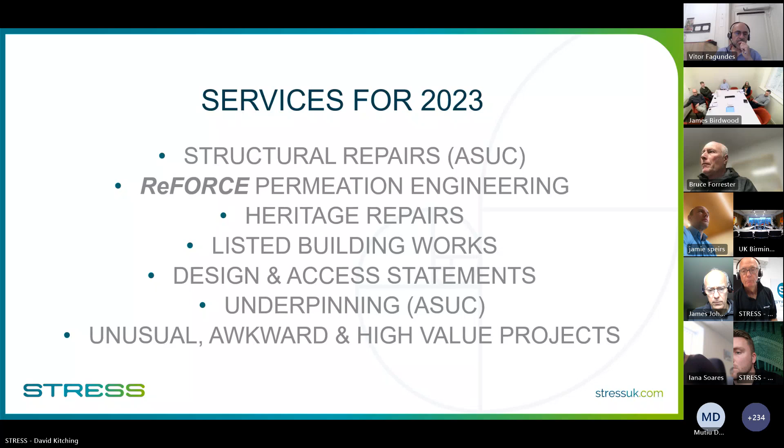For some reason that button's not working. So within the structural repair side, which we're going to concentrate on today, there is that standard masonry reinforcement. We're Helifix approved contractors. Crack bonding repairs, cosmetic refurbishment - we're going to look at that quite carefully today. Stone repairs, if you're dealing with old listed buildings, you're bound to have to deal with stone, and so you need techniques to go with that. And we give guarantees as well with any of the work we do.

So let's get stuck into it with something that I think you probably all recognise there, be it loss adjusters or engineers, surveyors, anybody that gets involved in buildings of any age really, because you can get ground disturbance at any time, causes problems. And there are obviously other reasons that go with it. That's the point - try and find out what you think has caused it and identify the cause before you really plan to try and put it right.

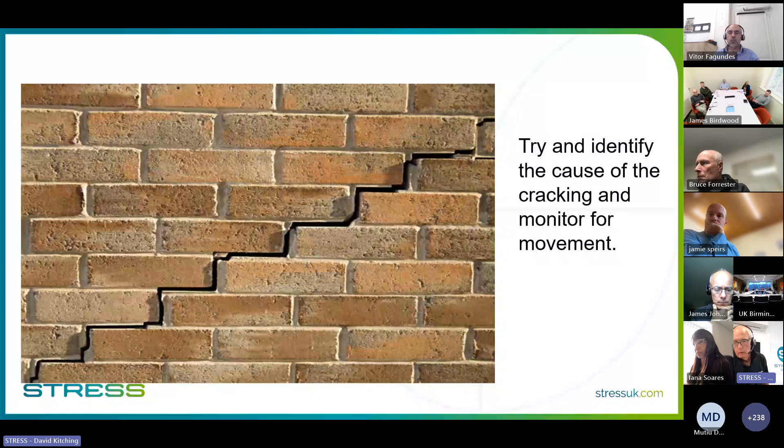Find out what caused the repair and what aesthetic issues there would be in repairing that structure. We'll see some of these issues as we go through today. You need to disguise the repairs, because if you're a property owner, or involved in your office block, and you needed structural repairs, would you actually want to see them, or would you prefer if they were blended in nicely so they can't be seen? So it's really important to think about the aesthetics when specifying a structural repair.

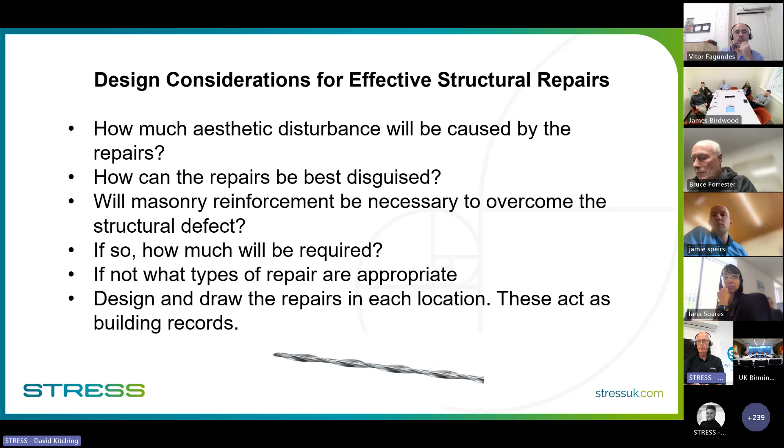Can you use masonry reinforcement? It's very useful, and if you are going to use it, how much do you need? Don't put too much in. And of course, put all this down on a drawing, because if you're going to use it within a listed building, you're going to need to record all the aspects of the repair.

For those who haven't seen masonry reinforcement being installed, here are three simple pictures showing the various stages. Top left, the guy with the blue hat is using what's called a Hilti wall chaser, which you'll see later in the presentation. Very useful tool - we've been using these for over 20 years, and they do a very neat, accurate cut into anything, concrete, stone, or brickwork.

The idea is to neatly take out the bed joint so you can install the masonry reinforcement. That picture shows him operating a vacuum recovery machine, which produces very little dust, useful when working around domestic properties. The guy at the bottom is feeding in, not helibar, but Betinox, a ribbed stainless steel bar also made by Helifix, which we tend to use more in bridges and larger structures, and he's feeding that into the slot.

The chap above is John Heseltine, general manager of Helifix, pretending to gun the helibond or grout into the slot which surrounds the bar and bonds it with the brickwork. You can then repoint over the top with heritage mortars or sand and cement, anything that matches the surrounding brickwork. So that's really how it's put in.

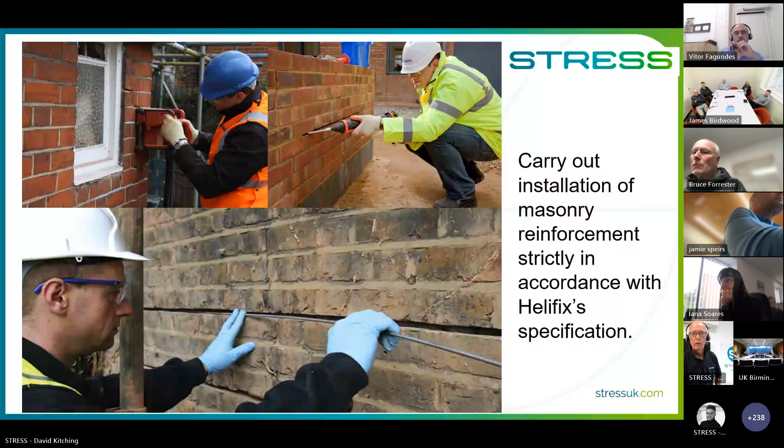The design is completely different, obviously, but that is how it's installed. So, know your building.

But don't be afraid to use modern materials. We use Helifix all the time in listed buildings. As long as it's carefully used and disguised properly, it's a perfectly good method of repairing and strengthening bits and pieces.

Involve the conservation officer early in your projects. Get him involved, tell him what your options are. He will comment, he may say no, I don't agree, or you can do that, I like that, tell me more about it. Let him know the pros and cons, and he or she will come on board and work with you on it. Very important.

Let's look at something very simple: a domestic property repair. This is very typical for loss adjusters, surveyors, and engineers dealing with insurance work - we see this all the time. Slight settlement of the left flank wall - we found out when we went in and did the investigation that those drain pipes, probably there since 1938 when it was built, were never linked to any drainage. They just literally poured into the ground, and of course they caused washout, slight settlement of that wall, and cracking.

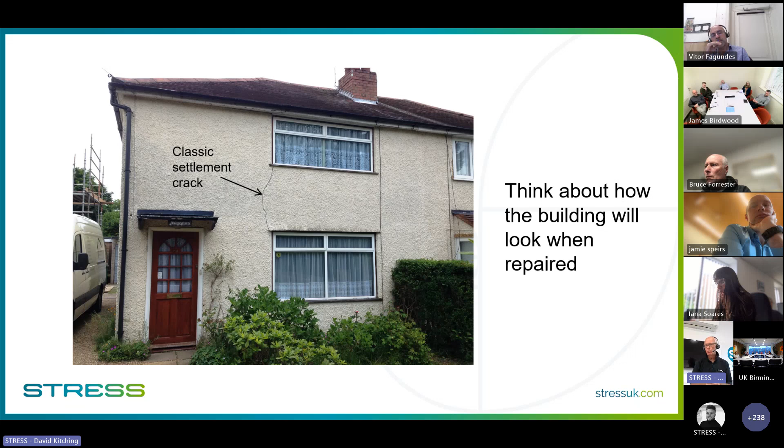It's been there, I don't know, 20, 25 years. It's had numerous coats of paint. You put a new line in, even if you're brilliant at it, it will always catch the sun somewhere and you will see those scarred lines. So what do we do in situations like this?

Go inside. Now of course that means you're going to disturb the inside of the property as well. When you explain to the client that's what you're going to do, they're usually pretty receptive about it. So we went inside the bedroom, took the plaster off, most of it falls off, exposed the crack, and installed what's called a heli beam — that's two twin bars to bridge that crack. Resin bond it, replaster, repaint on the inside, and you will never see it. So that's the beauty of that.

Now that is a solid wall, which means you don't have two different skins. But even if you do, those of you who know the Helifix standard details will see that you don't need to put a beam on both leaves, inside and out. You can do them on one, and then put ties through to the other. So if you're working on the outside, you can tie the inside to it. Perfectly legitimate.

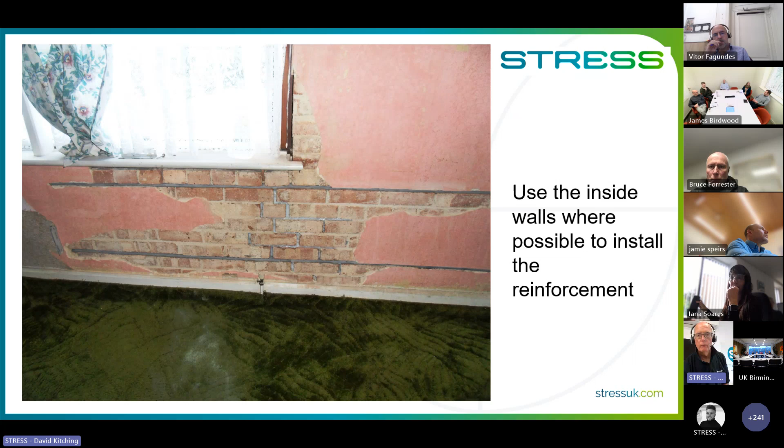Result. Now, when you go outside, all you need is some very careful cosmetic work to the render, making sure it's not blown. If you've got a big blown patch, you've not got much choice other than to take it off. But in this case, you do some very careful little render along the crack, sponges, different grouts, that sort of thing, and then paint it.

It's not invisible, but actually I go past this on my bike, cycling maybe 2 or 3 times a week, and in different lights it's very difficult to see, which I'm pleased about. So that's the art of structural repair — perfectly adequate structurally, but made aesthetically acceptable.

Right, let's go on to something a little more challenging. A listed building in a place called Haddenham, which is out in Oxfordshire.

We were called in by a main contractor who we do a lot of structural repair work for, and his special projects division had this old pub, the Green Dragon, to refurbish for a client who'd bought it, and I think actually wanted to flip it as a dwelling.

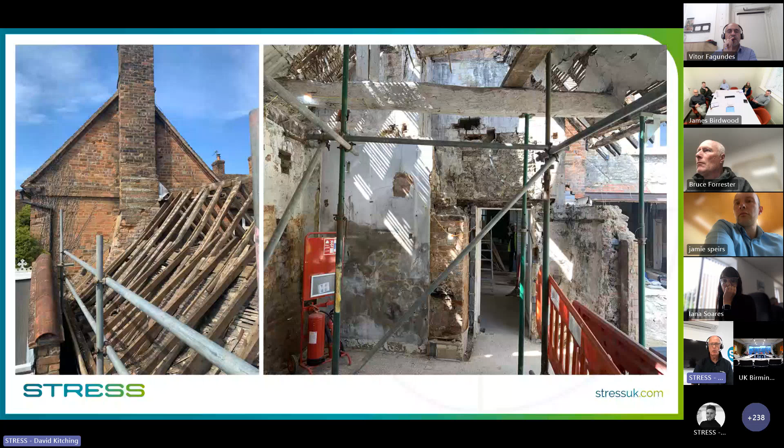We came across major problems, as you can see the state of it. But the particular problem we were asked to look at was that gable wall you can see on the left. It was waving about in the breeze, cracked all over the place, loose brickwork, and generally not looking very tidy. As you can see there, looking up it, the state of it.

We were called in to say, could we repair it? And we said, we think we can. What are the alternatives? The alternatives obviously were to take that wall down and rebuild it. The conservation officer wasn't going to have that, and the client didn't like the size of the bill he was going to get for that either.

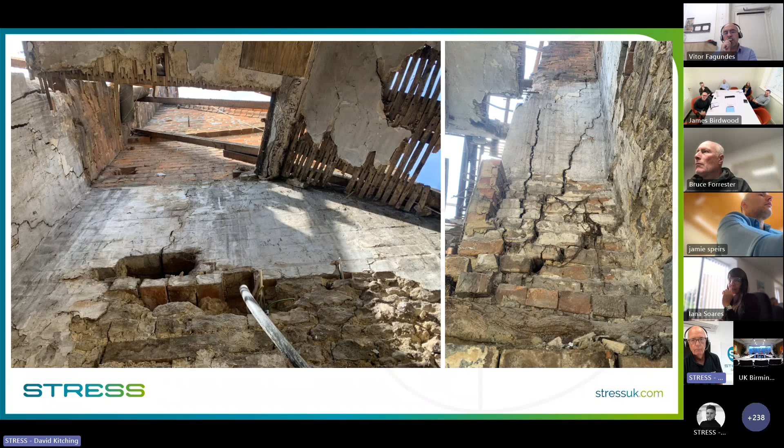So we were asked to put a scheme together for it, to see whether we could actually save that wall, structurally enhance it, and make sure it was good for the future. So what do you have to do?

Well, as with anything, there's nothing particularly wonderful about this. You make sure you've got drawings and drawing records for it, particularly if it's a listed building. These have to be part of the archive so that everybody can see what has been done in the past. But this was the gable. Normally we'll do it on CAD. This particular one, because it's interesting, was actually done quite quickly on architect's drawings so that they could be agreed with the client and the conservation officer.

So you can actually draw on everything you're going to do. They also act as drawings for your crew when they go on site, to know exactly what it is that they're going to do.

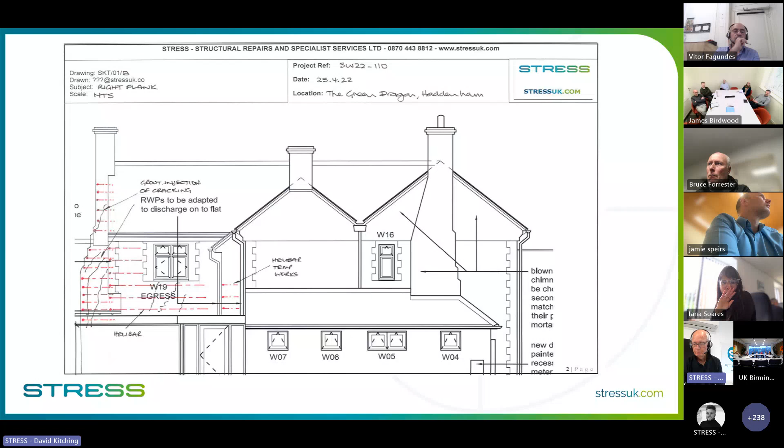Plan of that gable wall. Now the interesting thing here is where I've got that little handwritten note on the top right hand corner.

It's a standard detail that isn't used by everybody. What we see a lot of the time is specifications for an angle tie that goes around the inside of the wall, so on both internal faces.

Now the problem with that is the gable wall, as we know, was rebuilt at some point in time in brickwork, and was never tied into the flank wall of stonework, and hence it waved in the breeze. It was live.

So if you're going to tie that in, the best way to do it is to actually chase along the flank wall, drill through to the outside of the gable wall and return the bar on the outside. You then have the full tensile strength of the bar taken into account when you're tying it in. Just very simple details like that.

Obviously, if you're going round on the outside of the wall, we couldn't in this particular case because it was straight onto a party wall into someone's garden and they didn't want to play ball.

If, as you can see on the other corner, you go around the outside, that's always going to take the tensile stresses and strains.

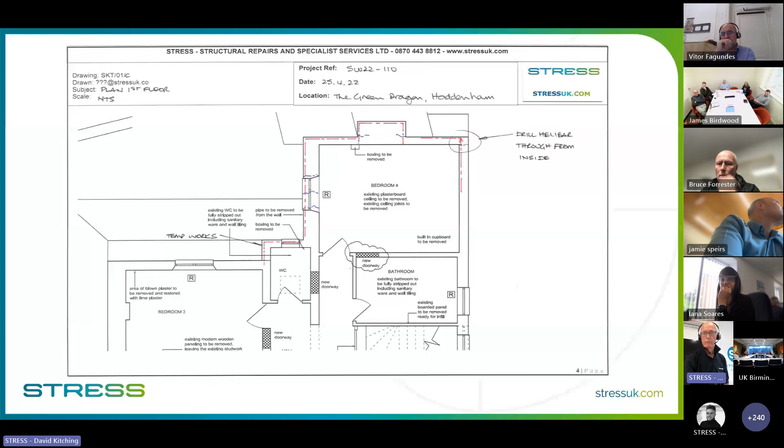Still not working now. So there we are. Right, we're starting to put the Helibar in.

Now, as you can see here, and this is another aesthetic point of view, that's stonework, fairly regular block size stonework, but irregular enough to cause a bed joint that's not perfectly straight. So if we then cut using the Hilti wall chaser into that stonework, we would end up with bed joints that were straight in a wall where all the other bed joints are actually irregular, and it would stand up like a sore thumb.

So in fact, you hand chase these out. We've got various tools we can use, but generally we'll use a hammer and chisel, and we'll actually chase out the bed joint to the right depth. You'll see why you do that in a minute.

You can then still put the masonry reinforcement in. It'll follow all those little nice lines, and you can surround it in grout.

If you've got brickwork, of course, you can use that Hilti wall chaser. And the important thing here, and why I show this photograph, is if you're going to site, you've got one of these jobs going on, and you want to see what the contractor's doing. These are the tips to look for.

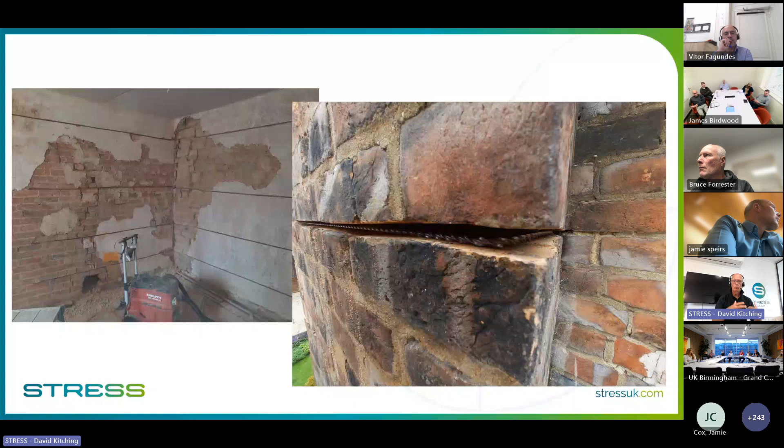This gives you an idea of when it's completed, you see in that stonework it's very difficult to actually see where we'd put the Helibar. In the straight brickwork you can see slightly different coloured mortar, like on the gable wall there, some straight lines, but that will weather down. We've used a lime mortar to match the consistency of what's there, and that will weather down over time so you won't see it. But in the stonework, where it's slightly irregular, you need to be really careful. As you can see there, when it's completed, it's looking pretty good.

So there we go. In fact, there's a heli beam running under that right-hand window you can see above the glazed extension at ground floor level, because they needed to extend the opening. There was an old steel in there, and we helped them by putting a heli beam under that right-hand window on the rear, which meant they could just do lightweight propping and get the steel in really easily. They put more load on that right-hand corner, but we just underpinned it and helped them take that load. A very successful little project.

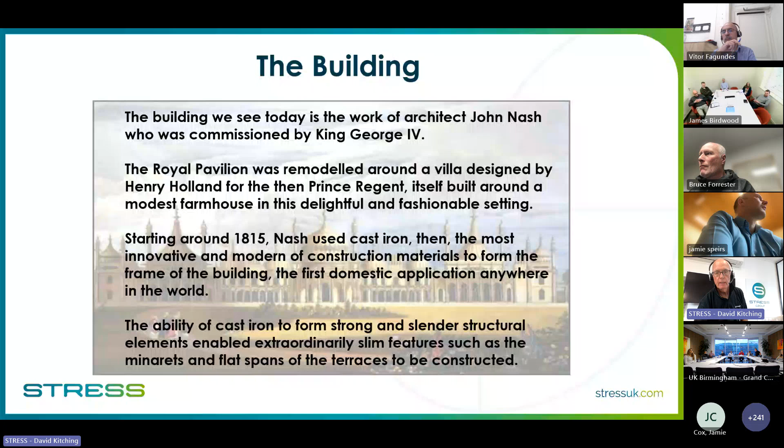And so he worked into it using this. These are the things you will know John Nash for, if you've been to or live in London - very famous for a lot of rather monumental structures.

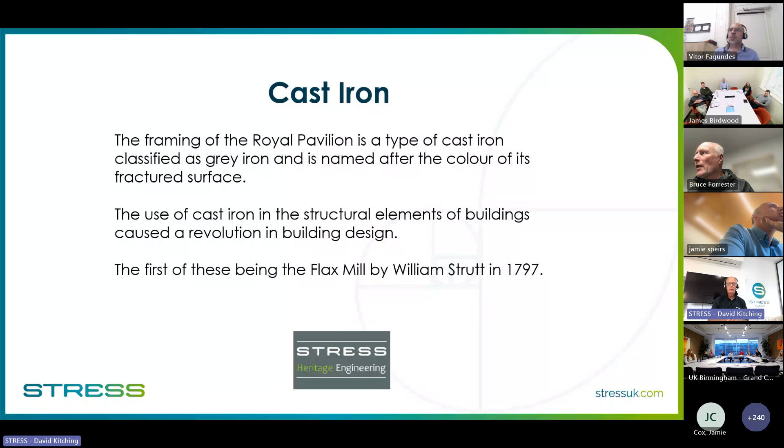So back at the end of the 18th century, he looked at the first type of building using cast iron, which was the flax mill up in the North Midlands. You can go and see this - it's a museum now, but it was an industrial building, a flax mill. You'll see in a minute how it makes a difference to the opening space you get. Can you imagine the old days there'd be brick walls or big timber columns, timber beams, timber floors - everything bounced around. By using cast iron, you can increase the slenderness of the columns. You use jack arches - cast iron beams with curved brickwork, transferring the load of the floor into the beams. So that's why he wanted to use it at the Royal Pavilion.

There is, however, a problem with cast iron. For those of you who have probably smashed a cast iron grate, you know that if you hit it hard, it will shatter. Which shouldn't really be a problem because most beams aren't going to get hit by a hammer - might get hit by a vehicle if at ground floor level, but unlikely to get hit by anything. But they do get brittle failure. And what happened back in the early 2000s was that a roof collapsed in Bayswater, a roof supported by cast iron beams, which put a scare amongst all asset owners who had cast iron elements in their structures.

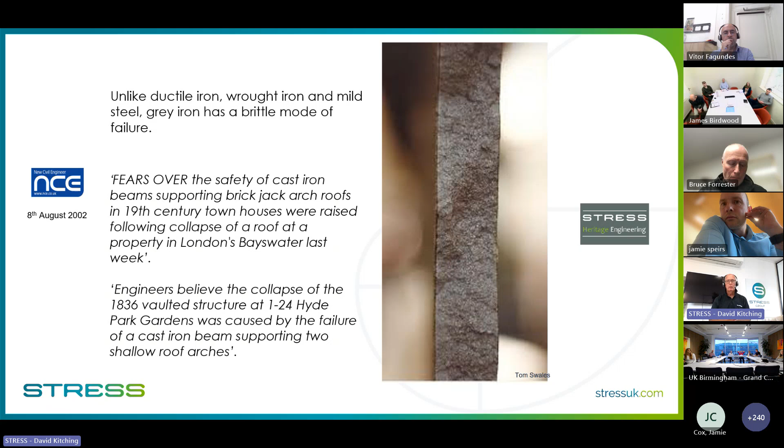We'll find out why you get that unreliable parameter with it. You don't know whether it's actually going to go or not, or exactly just how strong that cast iron beam is. And the reason is the way it's cast.

You've probably seen this on TV - they'll make a mold in a sand pit and then pour the molten cast iron into it. Now, while it's still molten, gases are rising up to the flange, which is the top at the moment, and they bring all the little impurities with them. So where you want most tensile strength, you've got a relatively unreliable and contaminated area of the cast iron.

So when you turn that over, you're not quite sure just how pure that cast iron is. And so what happens is it maybe gets overstressed, there may be an age issue, but it will suddenly fail, and it fails in a catastrophic way.

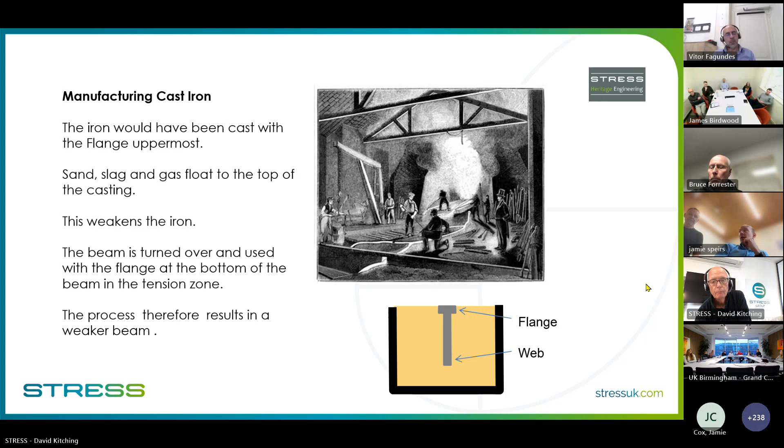So concerns were raised at the Brighton Royal Pavilion by the owners, and they brought in the same engineers who'd looked at the Bayswater collapse, John Holden Associates, who went and analysed the beams under the Adelaide Terrace and realised that it was cast iron of fairly poor quality, and therefore there was a risk.

That balcony is used for the public. You can go out there, you may have been out there. There's a restaurant, and on sunny days there's tables out there. You can go out and sit on that. It's used for weddings, for government and commercial parties and things like that. So you can have anything up to a couple of hundred people jumping about on that balcony.

There was a problem - nobody quite knew exactly what the capacity of that balcony was. And so they had to prop it. That was the shortest, simplest thing they could do while they looked for a solution.

So you can see here the centre line of props that were put up to halve the effective length of those beams, which are running between the wall on the right and the column and beams on the left.

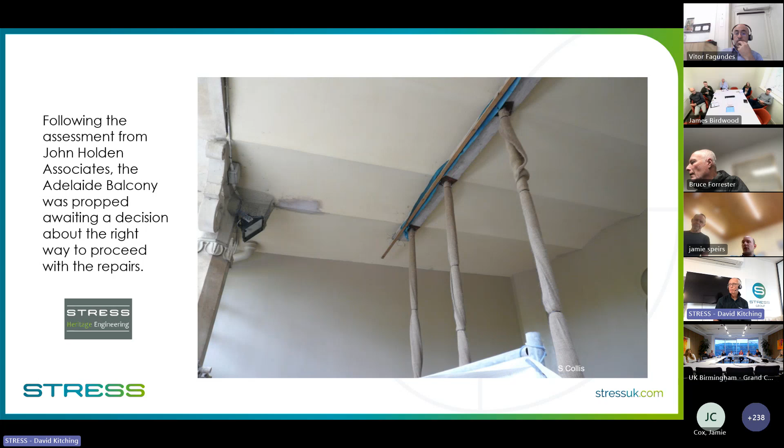And this is where we were called in because we'd done quite a bit of work for Brighton Council on some of their listed buildings down there, and they said, do you have a solution for this?

So we looked at it, we looked at all the information that we could find, and we came up with a selection of remedial options, one of which was to do nothing, but then you risk collapse, or you just don't use the balcony at all. That's really unacceptable - it brings a lot of money in, and therefore they couldn't have that.

So we thought, how about some carbon fiber? For those of you who have actually seen carbon fiber plate, it's incredibly stiff. And as you know, it's used for all sorts of purposes - very strong, very light. Wouldn't that be a perfect thing to use at the Brighton Pavilion? Remember, I'm thinking about innovative ways of strengthening.

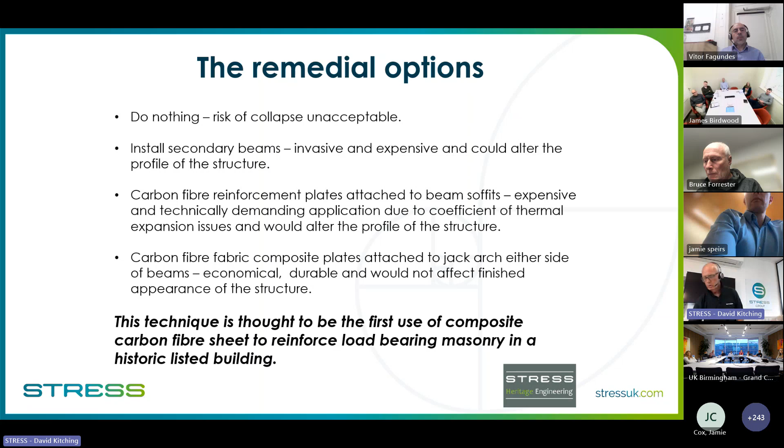Carbon fiber, we know, is used for all sorts of things, usually a bidirectional filament in the fabric. We don't want that because we only want to use this sheet in tension. So we're happy to have all the fabric run in one direction, like the plate, filaments less than 0.3 of a millimeter, all run in one direction so you get maximum tensile capacity, but they're not bound together with epoxy binder, so they're loose. This one's woven, bidirectional, but the ones we use are monodirectional. As you can see, it's got a loose weave in it to stop it falling apart, and then it can be used to adhere to any structure.

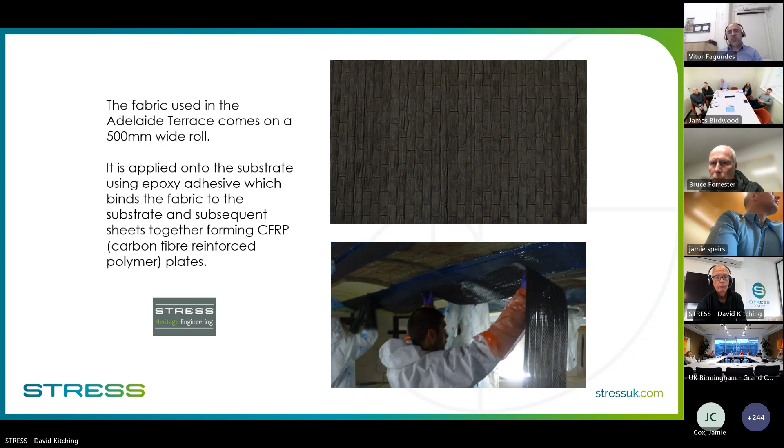Colin Toms and Partners originally came up with a design for strengthening jack arches, and this is what was used by our conservation engineers, CTP. They do a lot of work for Brighton Council and came on board with this. They're actually heritage engineers who deal with carbon fiber, so they were ideal for doing the design. What we ended up with were two strips for each arch, 200 mil wide, full length of the brickwork arch, on each of the jack arches.

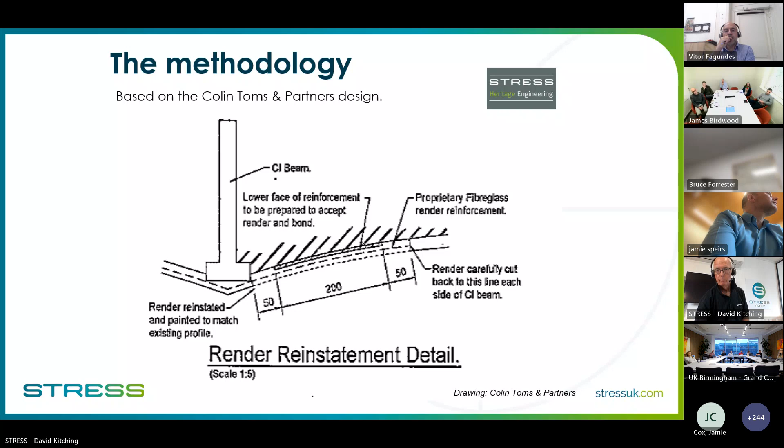Listed building, absolutely priceless. Behind those props on that wall and through the windows is the King's Apartments, full of priceless artifacts. So Brighton Royal Pavilion are paranoid about water, dust, fire, vibration, anything that could disturb the artifacts. And they wanted to keep the museum open as well, since it brings in revenue. So we had to be very careful.

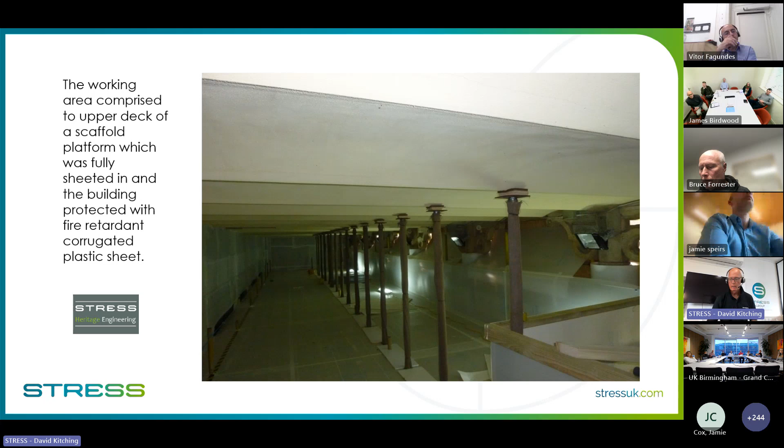Everything gets wrapped, fireproofed, and encapsulated. We had a full working environment, protected from the outside and protecting the rest of the building from anything we're doing. And here we are: we've got the scaffolding in place, all with fire resistant boarding, everything wrapped in fire resistant blankets, and ready for the off.

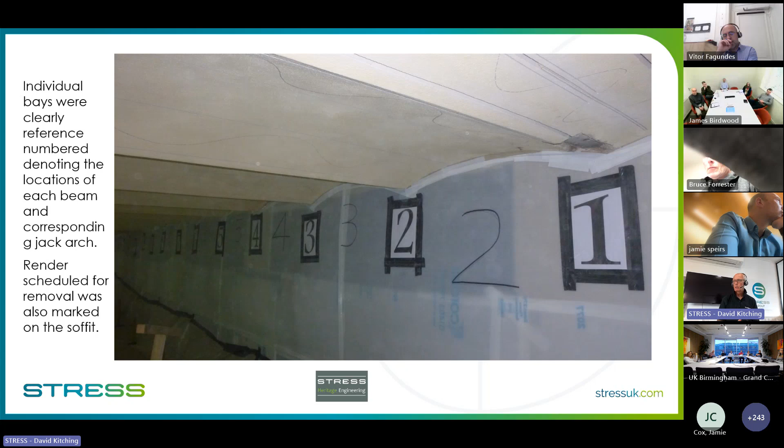Going back to listed buildings, you have to record everything you do to it, everything you find. So each of the cast iron beams was given a number, which you can see there in black with tape around it, and each of the brick arches was labelled as well. That means when you expose them, you can record exactly what you find against the number.

Now you can probably see that good old Hilti wall chaser again. We use those because we can control the width and depth of the cut very accurately, to less than a millimeter. What we wanted here was to take off as little of the render on the underside of the brick arches as possible, because one of the things with listed buildings is the conservation officer will only want you to remove the absolute essential amount of material. Leave whatever can stay, should stay. So we literally tried to take out slivers 200 mil wide—well, actually 300 mil wide, because you want 50 mil either side to get the material in—300 mil wide and the full length for each of those arches.

What we found was that a lot of that render had debonded and fell off. But you can see on the left there, that biscuit of render left in the middle—we had to keep it and match to it. So here we are, we've exposed the brick arches. Now you can see that in fact it's not only brick, there's a bit of stone there. These are the surprises you find when you uncover things—they'd used bits of Portland stone in the webs of the beams. We presume because a brick just wasn't quite the right size, so they used stonework cut to fit tightly in there and keep compression in the arches.

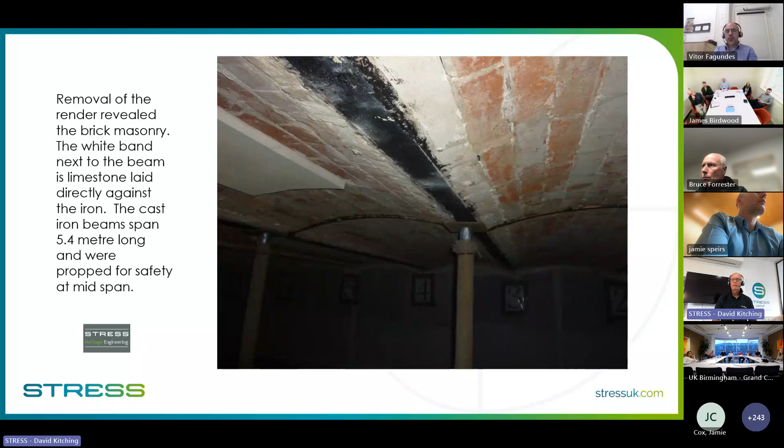You can see those beams are 5.4 meters, and there we are, fully stripped off. A lot of that render fell off, so it wasn't really doing anything other than just hanging off the surface, or the underside of the brick arches. We then obviously clean up.

And we've got ourselves a nice working environment. Now, for those of you who haven't dealt with carbon fiber before, I'm going to go back to that plate. To make this work on any surface, in other words, mostly this is used to adhere to the underside of reinforced concrete slabs and beams. But if it doesn't bond to the concrete, it's never going to be able to distribute the load into it.

So you have to do what's called pull-off tests. And here we are testing the brickwork, because again, if that brickwork couldn't transmit its load to the carbon fiber sheet, you might as well use duct tape. So we need to check the bond. These are little 50 mil diameter dollies, about 2,000 square millimeters on each area.

You glue it to the surface and then you try and pull it off. And as long as you reach a minimum of 1.25 newtons per millimeter squared in that pull off, you will fully mobilize the tensile capacity of whatever you're going to put on the surface. So we went round and we tested in various areas and got really good results. I've got to say, it was amazing.

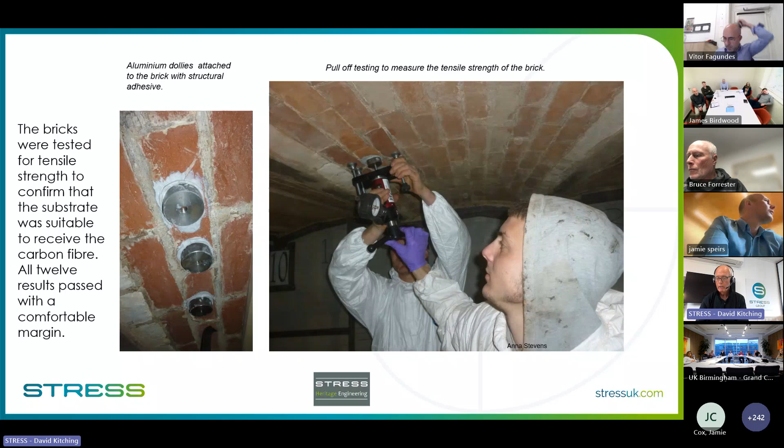So before we started putting the carbon fiber on, we jacked a little bit of load out of the balcony itself. Each of those props had a little flat jack put on the top. And you've got Annie here. She's our conservation manager, and she took charge of ensuring that we had 8 kilonewtons in each of the jacks throughout the project.

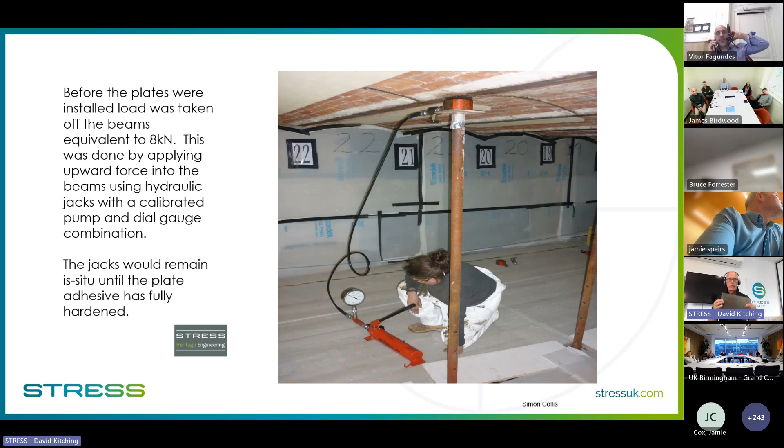That just takes a little bit of deflection. I know I said they don't bend, but you still get a little bit of deflection in the balcony, and it was enough that once we removed those and you get that little bit of settlement of the balcony, it will put the fabric under tension and the fabric will then immediately start helping the brickwork.

So we got ourselves this laboratory now, and we have to cut the carbon fiber sheet. This was a few years ago. You can now get sheet in various different roll widths. In this particular case, we had to buy it at 0.5 meter and cut it down to 200 millimeter strips. So it's a relatively easy thing to do with shears, you just run along there and do that into the rolls you've got.

You then need to make sure that your brickwork is perfect, because if there's any dust on there—for those of you who've cut your hand, got a dirty finger because you've been gardening or whatever, stick an elastoplast on it. Elastoplast doesn't stick to mud. Well, it doesn't—carbon fiber won't stick to dusty brickwork either. So the brickwork has got to be really clean.

So it's cleaned and it's then primed. You actually put a primer on it. But what you then find, if you put a straight edge to it, is there's lots of little variations between the bricks. They're not quite at the same angle. They're not quite the same height, which doesn't really matter structurally.

But when you're trying to stick something to it, can you imagine sticking wallpaper to badly plastered walls where bits of plaster are missing? You get debonding, you get holes where the paper isn't attached to the plaster. And as soon as you start doing that in brickwork, you're reducing the effectiveness of the carbon fiber. So you have to make sure you're sticking to a uniform surface. So unfortunately, even on decent brickwork like this, you've got to put up what's called a regulating coat.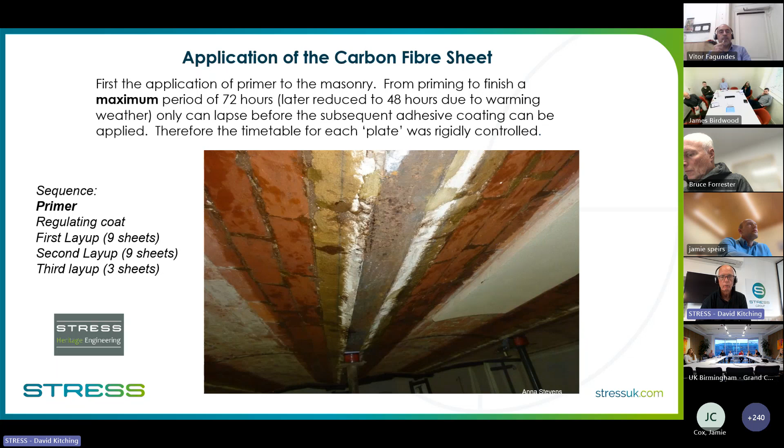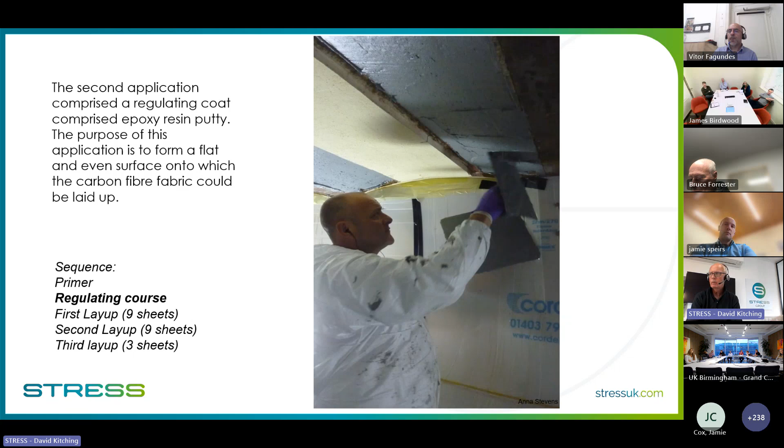As we can see here, we are about to lay on 21 sheets, layers of carbon fiber sheet. Don't know why it wasn't 7, 7, 7. We ended up doing 9, 9, and 3, but there we are.

And you put it on with, as you can imagine, a fairly low viscosity epoxy resin. We use blue only because we could see where it was, no particular reason. Normally it's sort of a honey color, and it's fairly low viscosity, so it will soak through the carbon fiber sheet, and you end up with a complete monocoque of carbon fiber and cured epoxy.

When you've put one sheet up, to make sure that it's bonded tightly to the one above, you use a sort of rubber squeegee and pull it through, which squeezes it tight up to the layer above, and makes sure that you get resin passing all the way through.

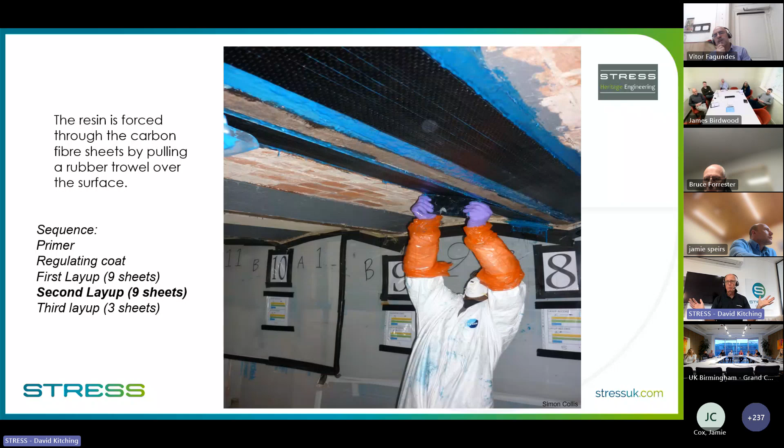You then go wet on wet, putting up those 9 layers, then leave it and move on to the next one. The more wet you've put up there, the more that's hanging while it's curing onto that first layer. If that first layer doesn't bond, you might as well not have bothered. So you do it in layers, let it cure, and you can get there.

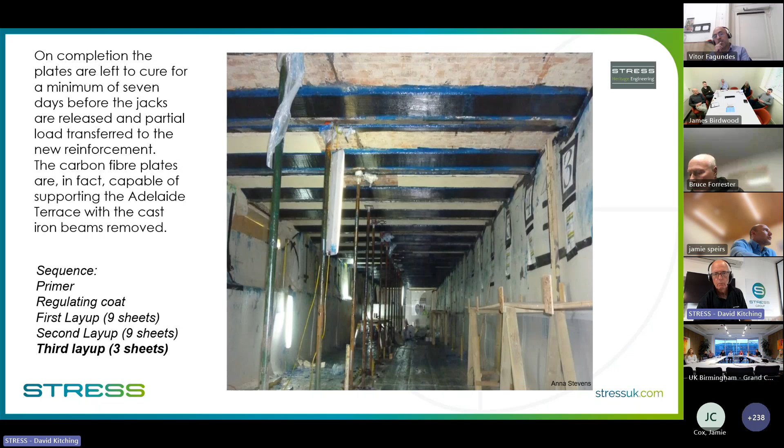So there we are, we've got all the beams now strengthened. The next thing is to do the aesthetics. This is almost the most important bit in terms of the listed building work - we've got to put back the render that's missing.

So you put a scratch coat up. We had the render analyzed, and what was amazing - because we imagined it would be a lime render - it wasn't, it was sand cement. So it must have been done within the last 30 or 40 years. They didn't have a record of it that we could find, but we matched it. They did allow us to put in what's called SBR, an additive that makes it slightly more sticky, so it bonds much better to the substrate and to itself. That's a scratch coat, and as you can see, our master plasterer John did quite a remarkable job matching up the render on the underside of it.

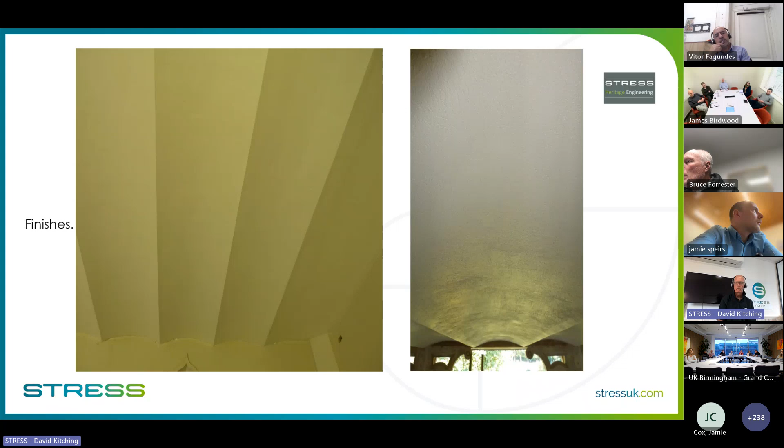And when it's completed, it looks like that. So the Adelaide balcony is now strengthened with carbon fibre. It has a factor of safety in excess of 2, and they can use that balcony quite happily, jumping up and down on it and partying.

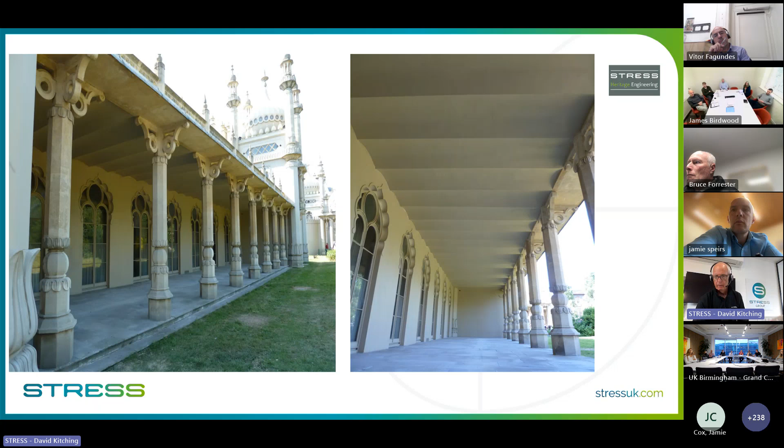So a very happy client and a very happy conservation officer. These sorts of heritage works will take us all over the country, and we can help anybody dealing with it - with design and access statements and making sure you can get listed building consent for those who have problems with that. But we love unusual projects, as you'll see.

We're gonna go on to structural repairs now. Sorry, I don't know why the button's not working.

And it's been great up until a few years ago when they started getting cracks - we think through foundation movement, we can't find any other explanation. The problem was that mortar and bricks were dropping out of the arches onto the main aisle, which is used for the monks to pray 2 or 3 times a day, and for the general public who pay to come and have a look. So it became a health and safety nightmare. We were asked to come in and see what we could do to make it safe - rebuilding wasn't really an option, just to make it safe.

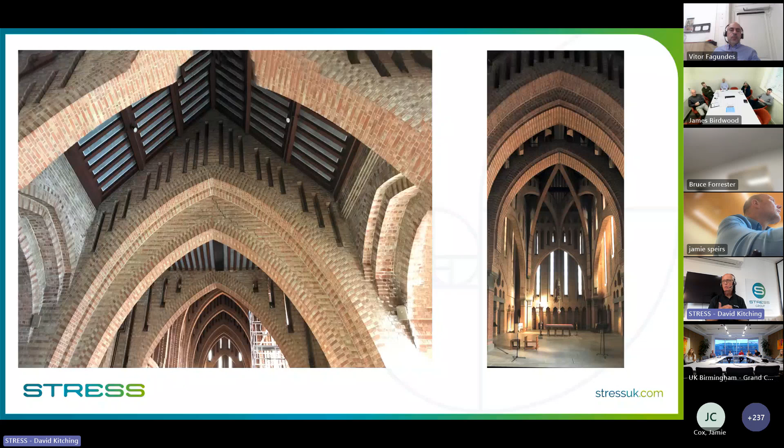So we designed a system of tying plates, helibar, pins, and resin bonding to hold the whole thing together.

You can see the height of these things - I think it's 12 meters to the crown. We couldn't put a full scaffold up, which would have made it very efficient to get to each of the arches. We had to use a tower instead, which slowed everything down, but meant that when prayer was on, we could move it to one side and go down in the crypt to work on the arches there. So we didn't have any downtime, but you can see the sorts of movement we're starting to get in the building.

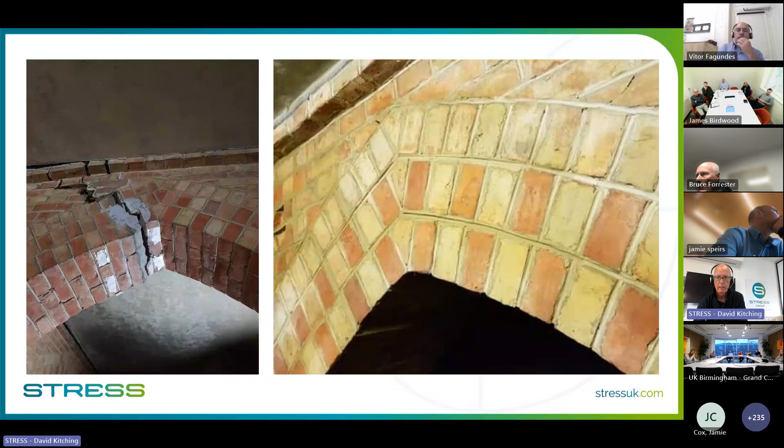And what we then do is incorporate the helibar into it whilst we rebuild it. The pins and everything are all in there, and plates, so that it can move a little bit, and it might get a little bit of mortar dropping out, but it will distribute the load around the arch away from the crown and prevent that sort of splitting that you can see there. That's a flattened version of what we see, but well worth going to have a look. It's a stunning place.

So I'm now going to take you onto another historic project, slightly unusual, also in Bath. A lot of you will probably have been to the Roman baths. This is a project right beside the Roman baths.

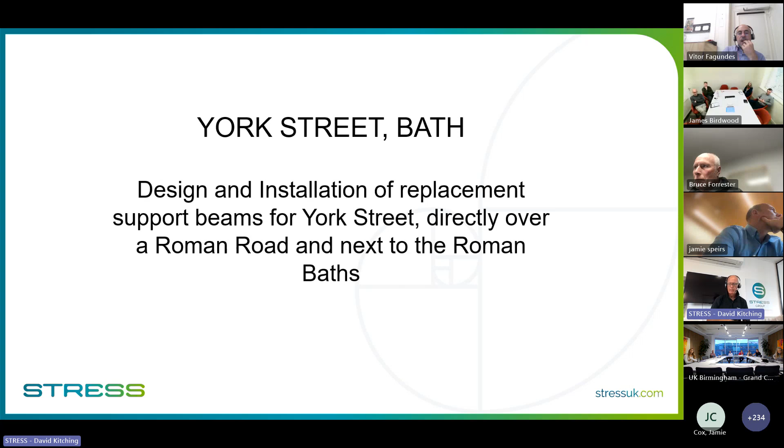And involves it, so you will probably have walked around the area, and that is York Street. You can see it going, left-hand picture there, going through and under that arch. And the wall to the right-hand side, where those two ladies are walking past, is actually the dividing wall - that is the Roman bath. So if you climbed that wall and looked over into it, you would see that main exhibiting Roman bath, the outdoor one. So that's how close we are.

Now the problem with York Street was that it's a modern invention. It was raised from a whole story below, from the old Roman level to that level, by the Victorians, who equalized out a lot of Bath so that you got all the shops at the same level, above all these Roman remains that were down there. And of course what they did was use a composite beam or series of beams to support the road and concrete jack arches - very similar setup actually to the Brighton Royal Pavilion, but this was steel beams surrounded by concrete.

But the problem is, of course, they're over 100 years old. We start to get corrosion. You've got very warm temperatures from the sulfur springs that feed the baths. You've got moisture coming in from the road through lack of maintenance, and just general seepage, probably coming down through foundations also into the area. You therefore get corrosion of the steelwork, and it got to a stage where they couldn't be certain what capacity they'd got. So they shut York Street from lorry loads and any sort of traffic. It became a pedestrian area, which is nice for pedestrians, but didn't help with bringing lorries in to stock shops and that sort of thing.

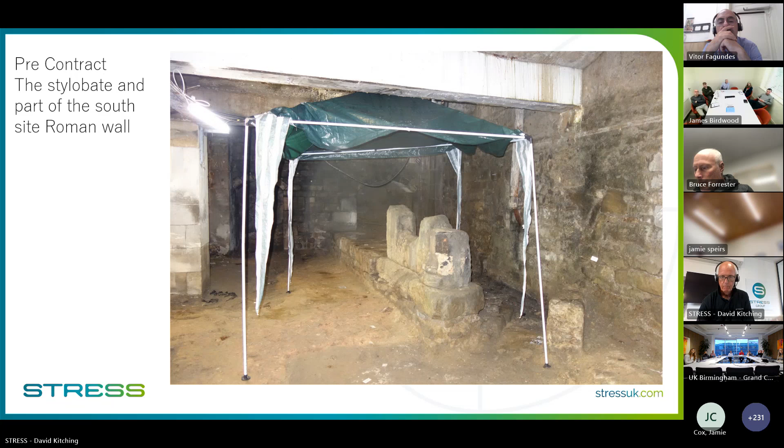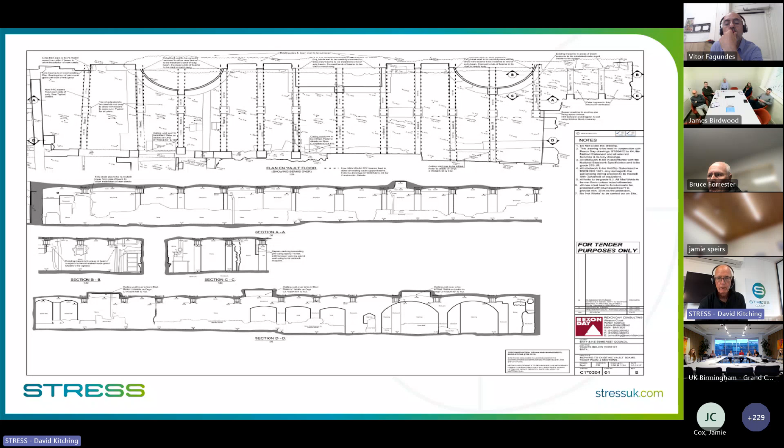Now the Roman baths themselves are just at the top of the plan, so you can see those two curves and that center rectangular cutout. Those are, if you've been to the Roman baths, those recesses where you can stand and have your photograph taken with a centurion or peasant, whichever you fancy. And that is the dividing wall between the area that we've got to work and the Roman baths themselves. You can see that some of the beams actually extend through into the Roman bath area, so that meant we couldn't really remove those beams and replace them, because we'd cause too much disturbance and noise to the Roman baths themselves.

And because it brings in so much money, they couldn't afford to shut the Roman baths and let us carry out the work.

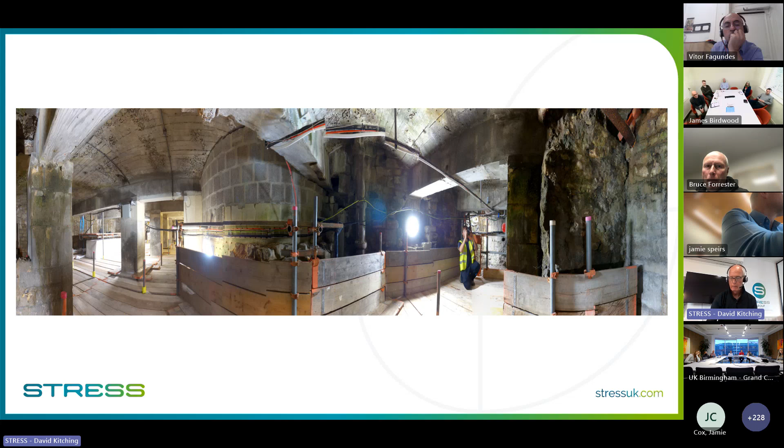So we got permission from the archaeologist to erect a scaffold. That wasn't easy in itself, because you can imagine all those stanchions are sitting down onto the Roman pavement, so we had to protect it within an inch of its life. Scaffolding goes up, you've now got yourself a working platform. You can see the beams, you can see the columns, and you can see those dividing horrible concrete block walls that are separating you from the Roman baths themselves. We had to monitor for vibration, and if the vibration got too high, they would stop us working.

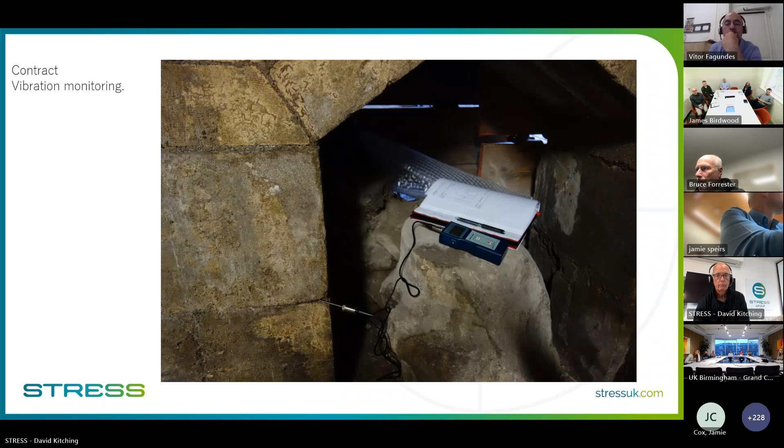So off we go. But you can see that not only down there are the pipes, there's power cables, services such as water and gas. There was even fiber optics down there. So we'd have to work around all this sort of malarkey when we were working in there.

And to come up with a scheme that could get around the problem of corrosion of those composite beams. Now, those composite beams actually were two I-beams butted together, surrounded in concrete. The mistake the Victorians made was to not infill the void between the flanges. So it was allowed to get moisture in there and corrode. And so we were getting corrosion mainly at the ends, and nobody knew quite how much.

So we had a bit of a look, and we looked at over one of the columns so that we could get an idea. Yeah, okay, that beam was a little bit corroded, but really not too bad. But when we looked at the ends, which were open, that's where the corrosion was. And so the end bearing couldn't be relied on.

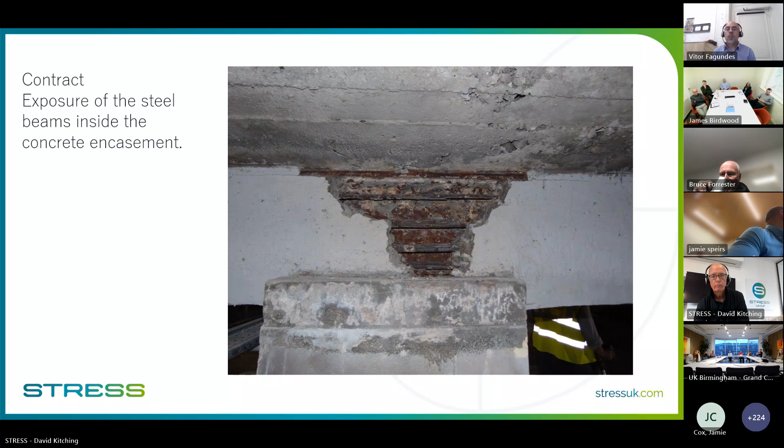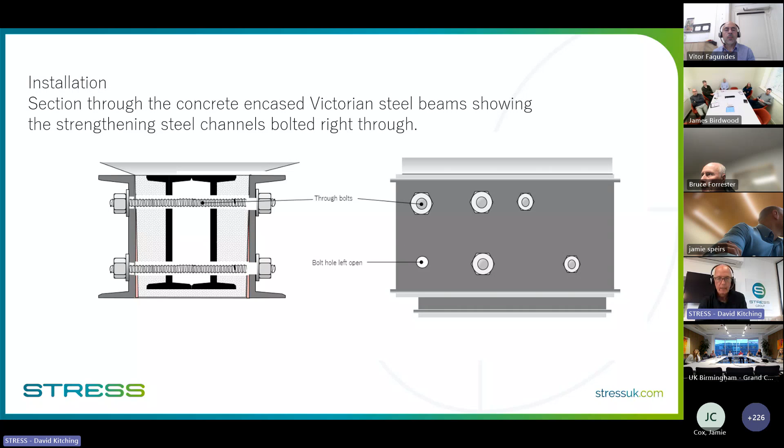And that meant we could bring in new beams, clamp them to the existing beams with very little disturbance to the Roman baths or the Roman artifacts below us, and get on. But practically, this was not easy.

Here's a typical beam. It is one of, I think, 14 we did. Each were different length, slightly different angle, and you couldn't make one template to work each one, because we've got to put holes through all those. So each individual beam had to be templated, and we had to bring the steels in 3 sections for each side of the beam because of the length, about 7.5 meters in total.

We just couldn't physically get anything bigger than about a sheet of ply into that basement, because you couldn't come in through the Roman baths. That would have been too disturbing. You couldn't come in through, shall we call it, the tradesman's entrance, because it was like the maze at Hampton Court. And so, in fact, we had to use a manhole in the street to bring everything in. So it had to be limited in length and size and handleable.

So we set about drilling. There are over 1,500 holes that had to be drilled in exactly the right position. So that template was used to mark it, and an exactly the same template went to the fabricators to drill the holes in the steelwork. Then it went off for galvanizing and then came to site.

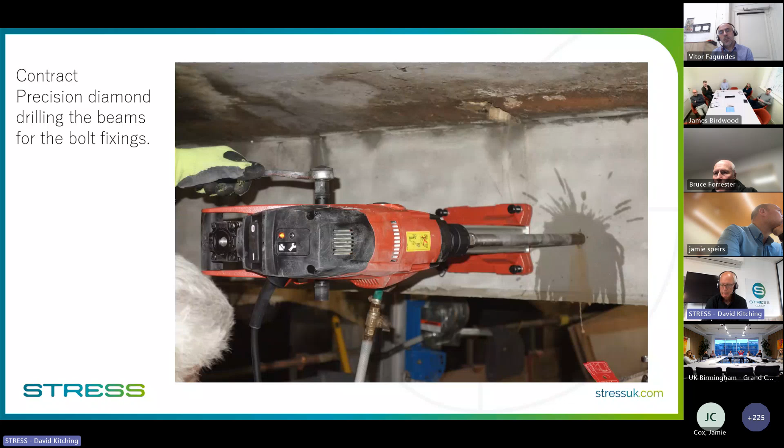So these drillers did a really good job. They're not used to this, but they went through concrete, steel, void, steel, concrete, and they had to be accurate because that bolt's got to go through and it's got to match up both sides. We wore bump caps, although that chap's not wearing it for health and safety reasons. But in fact, as you can see, nothing can fall on you.

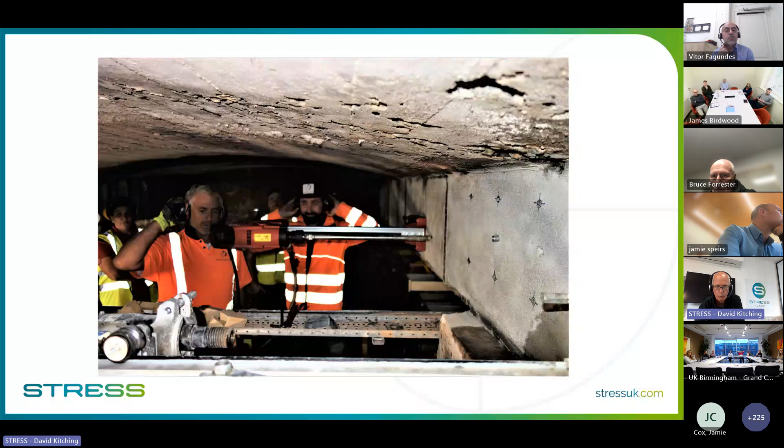We took samples of the Victorian steel. As you can see here, it's nearly 17 millimeters thick in the webs. And actually very little rust, as you can see. It was the ends of the beams that, as I say, were the problem.

Now, when we're going to, well, not necessarily adhere, but we're going to bolt onto the sides of the Victorian beams, these two C-sections, they have to be normal. And they weren't. The sides of the infill or the surrounding concrete from the Victorians was all over the place. It didn't need to be neat. So the shuttering had moved a bit. It was irregular. So we actually regularized the whole thing so that we could bolt and get the two C-sections absolutely level and vertical.

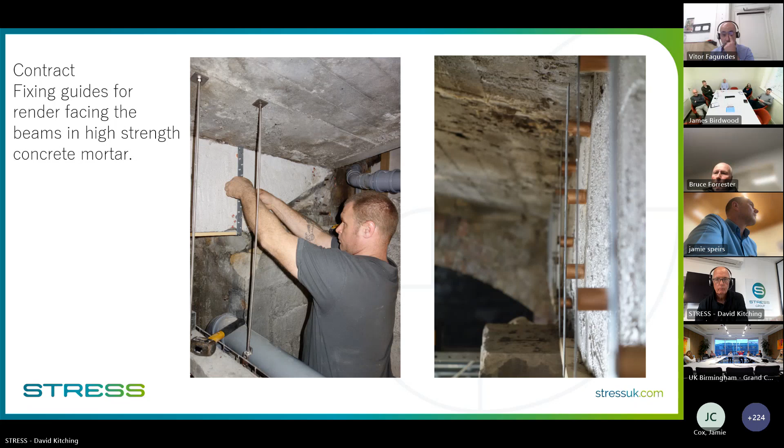So we actually used, we set those little bits of galvanized, you call it bat strap, in the perfect vertical position, longitudinally and vertically, and it meant then we could render over it with a structural repair mortar, high build repair mortar, and that's what we see going on there.

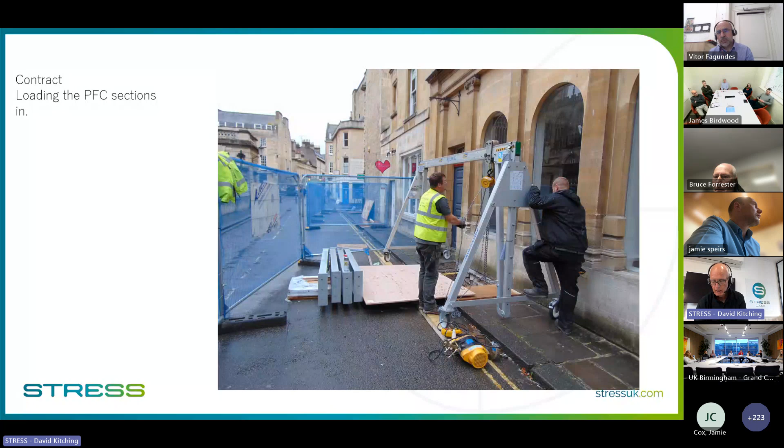Slid down into position, onto the scaffold deck, maneuvered, and we used these very lightweight little scissor lifts to lift them into position and bolt them. A lot of accuracy needed to make sure everything joined up. And then you dry pack the bottom over the columns and the tops again to make sure you got full contact with the column and the concrete above.

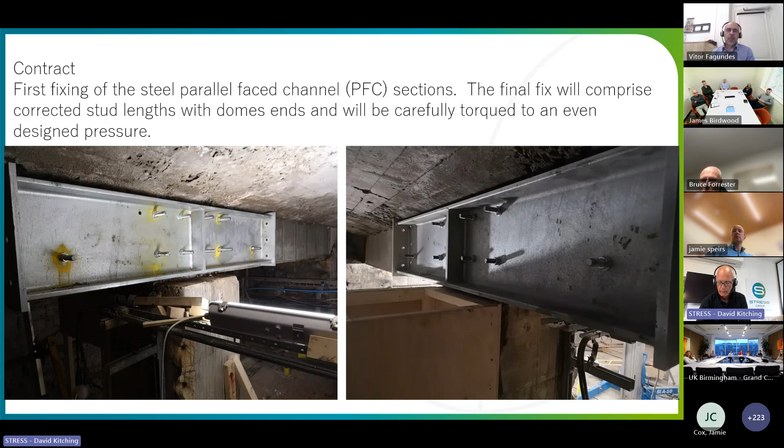Now remember that the Victorians had left a void between those two steels. It's silly to leave it when you're doing all this work. So we actually had holes drilled in the galvanized steel C-sections and left as holes so that we could then drill into the center and grout up that middle section. So it reduced the speed of corrosion of the two steel beams and made sure that everything really hangs on for a good 120 years or more.

Because you're grouting over a Roman road, the conservation officer and archaeologists were paranoid we'd get grout into the sand protecting the Roman pavement, so you can see we used paddling pools and buckets and visqueen and everything to protect it. But it went pretty well. We got an awful lot of grout in. The grouting operation really took quite a long time. We didn't get any leaking out into the Roman baths, which was great.

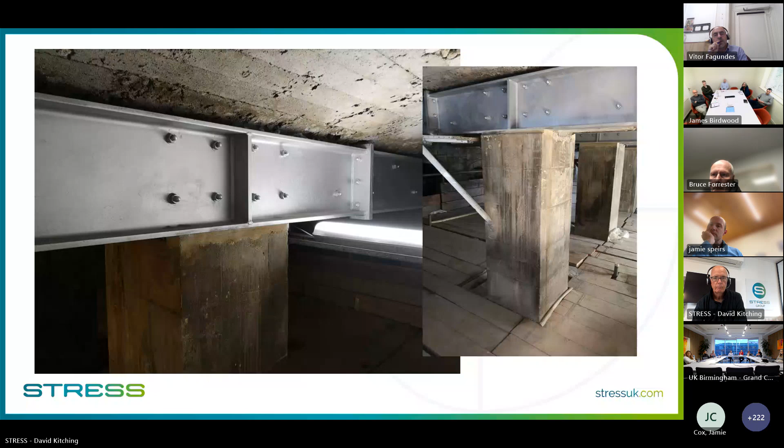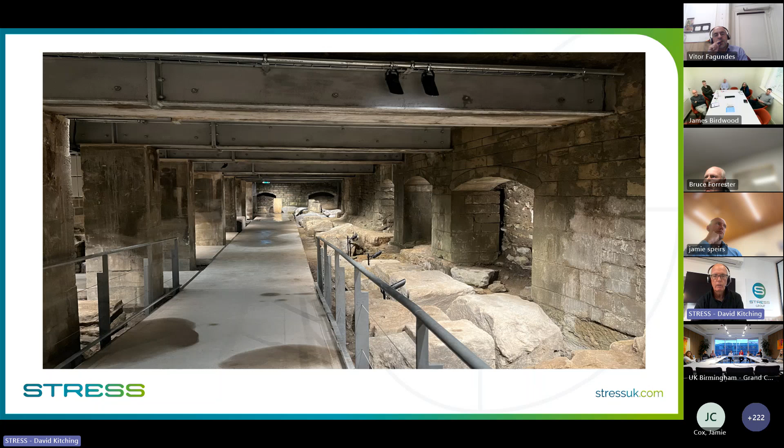And that's it finished. Nowadays you can actually go down there - it's an exhibition area. As you can see, they've opened it up to show off various Roman artifacts that they found. Obviously a lot of schools go down there, and there's actually a little archaeological area that you can dig for fake artifacts - the kids love it. So again, a very interesting problem-solving exercise and fascinating to do.

And we wouldn't go in the hole. It was far too much of the arch missing, which you would say, well, probably all right. But when I tell you that his house back wall was sitting on the crown of that culvert, and this isn't an ordinary house - this is an old stone mill, it's 3 stories of half-meter thick stonework sitting on the crown of that arch. So in fact, we wouldn't go in there. We used a GoPro on a stick to have a good look and survey of what it was that we needed to do.

But we were asked: could we repair it with the house in situ? Could we do that safely? Because if we could, it meant they didn't have to decamp the client - saves a lot in accommodation fees. The alternative basically was to take down the back wall of the house, take down the culvert, rebuild the back of the house. You can imagine the problems there, particularly when that's a live stream that runs along the bed and has caused this washout due to probably the flooding conditions we're getting nowadays and the age of the structure. Basically got scour, it washed out.

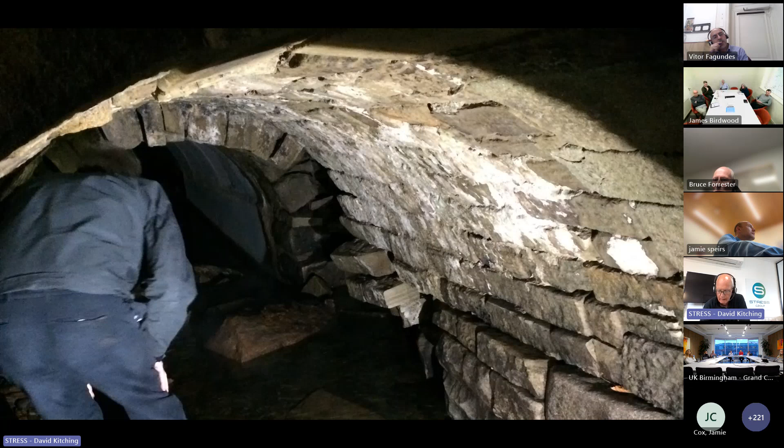You'll see the sort of void that's being caused. Now that guy, if he turned his head to the right, you would see a void up there under his house into which you could probably put a mini clubman estate. It's not small. Hence him taking risks he didn't need to.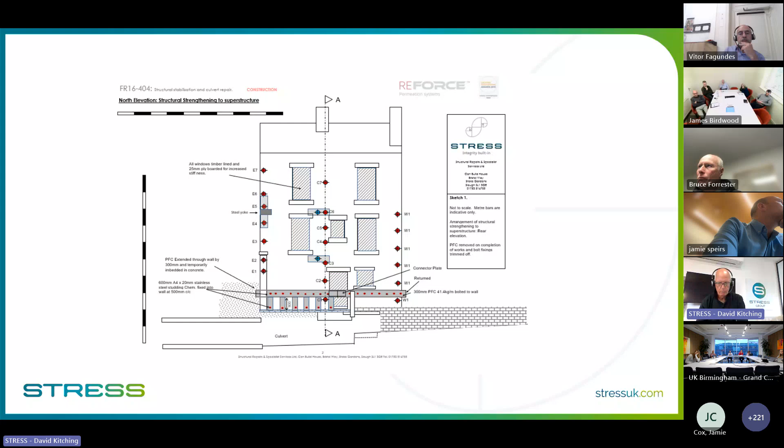We of course had to monitor it, so this was dynamic monitoring. We had a total station set up with targets all over that rear wall, and warnings would go off if there was any movement of any of those points. We checked it each morning, each lunch, before going back in the afternoon, and at night, then compared it with the morning again. Actually, we got no movement at all.

There you can see just the ties that went through with some of the clamps and bits and pieces we had. But that gives you an idea of the void that was under the back of that house - just shows how good stonework, or even masonry really, is at spanning. Remarkable. But that was our problem.

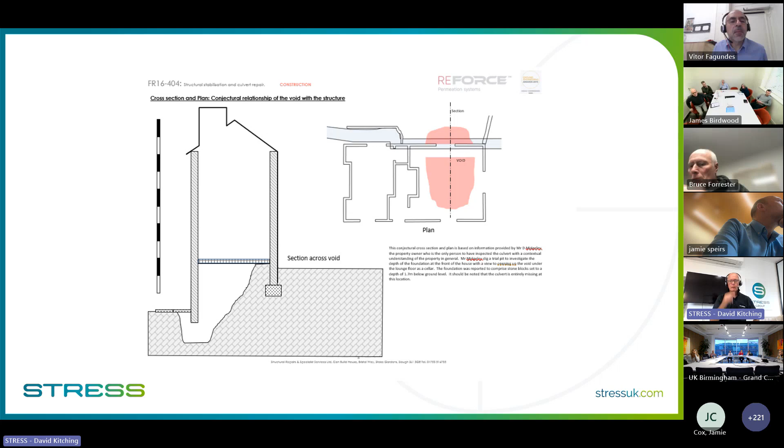So that's what we had to do, and these were some of the drawings. You can see what we had to do in the bed of the stream: dig out, bag fast setting material, prop, and get that into position. Once that had gone off each day, we could do the next section, then go in and rebuild. And that was it completed. I think we did this about 7 years ago now.

I think at the time it was about £250,000. We had to work within the stream with reduced flow - we pumped some of it through as much as we could, especially as soon as it rained, because this was in Ramsbottom, up in the northwest of England, and as we all know, we get plenty of rain up there. So we had to deal with some flood conditions, in which case we couldn't work, but each time safeguarding the fact that nothing could be washed away. It worked pretty well and we completed the job.

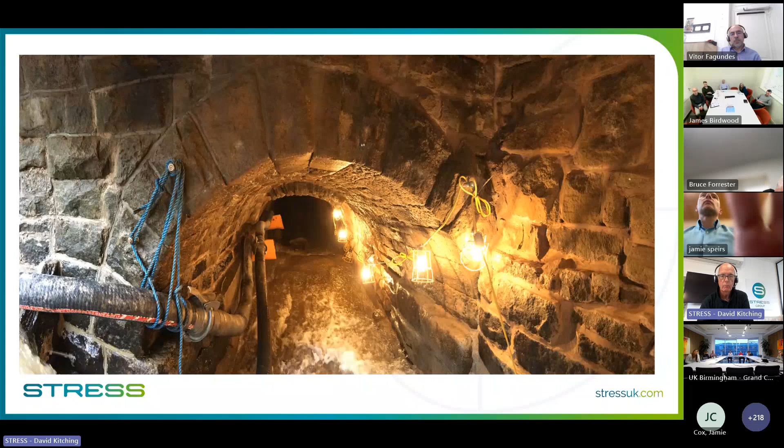Very happy client. Well, guys, I don't know what time it is. How are we doing, Matt, on time?

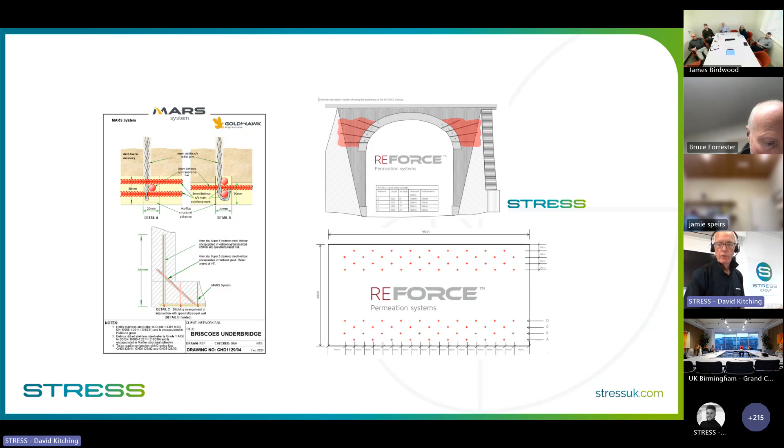So that's what we aimed to do. That was the first thing that we aimed to do. This is what the MARS system looks like.

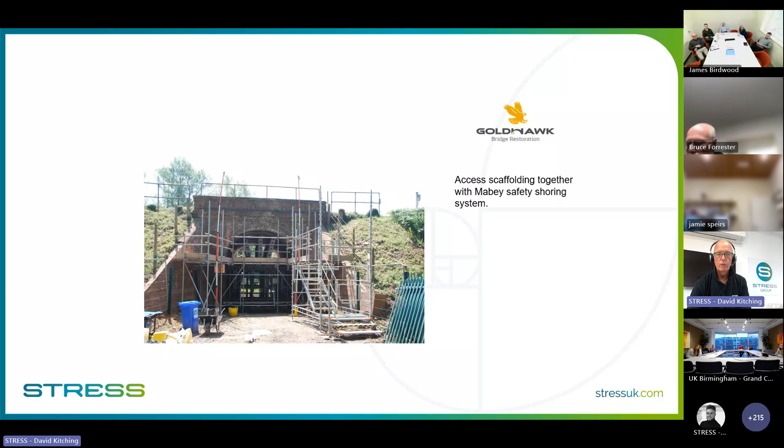This was a setup. We don't normally put props in, but with that sort of deflection going on and guys working under there, keeping the railway open, which was the important thing, we put a safeguard in, very much like we did up at Ramsbottom. And here it is, and you can see the dynamic monitoring going on.

But for those of you, and this is a little lesson in arch repair and strengthening, if you put a prop in an arch and continue to allow it to take load, the arch will buckle around that prop because you're not getting distribution. So if you're going to put props in, you need to allow the arch to move.

So in fact, as you can see there, there's rather a thick black neoprene gasket that is 25 mil thick and is allowed to compress. So the arch could still deflect, distribute its load properly, act like an arch does, but if there was a catastrophic failure, the props would come into play and give our guys time to get out. So that was a theory. It worked perfectly.

So this is us. We've driven our lances to depth and we're now injecting. Now, to give you some idea, for those of you who know geotechnics, you'll know in soils of almost any sort, the void ratio is somewhere between 0.3 and 0.35 probably, which actually means that around about a third of the volume of that soil is void.

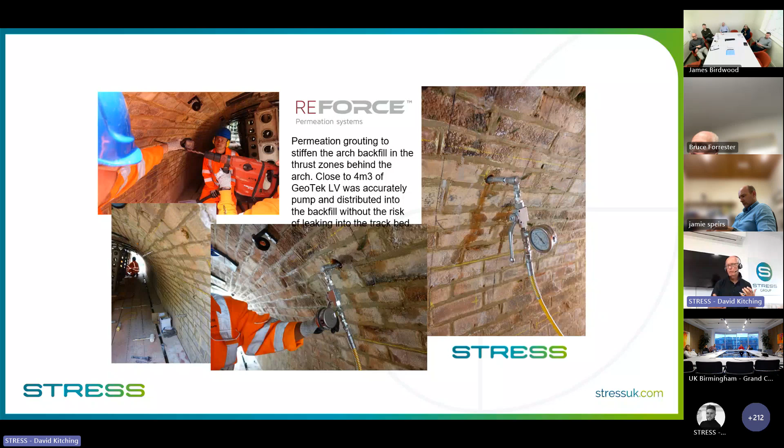We know that this technique only allows the resin to go about 250 mil from the lance and stop. It then takes on the moisture that's in there and expands slightly, and then gently pushes itself through the soil, so it solidifies and strengthens the soil to somewhere around 3.5 to 5 newtons per millimeter squared. And what that basically did was reduce the deflection, on the same scale, by about two-thirds, from what we were measuring at about 6 to about 3, or just over 2.

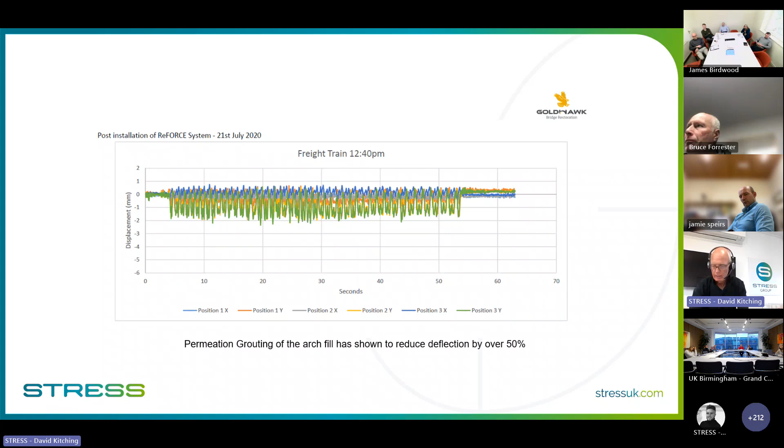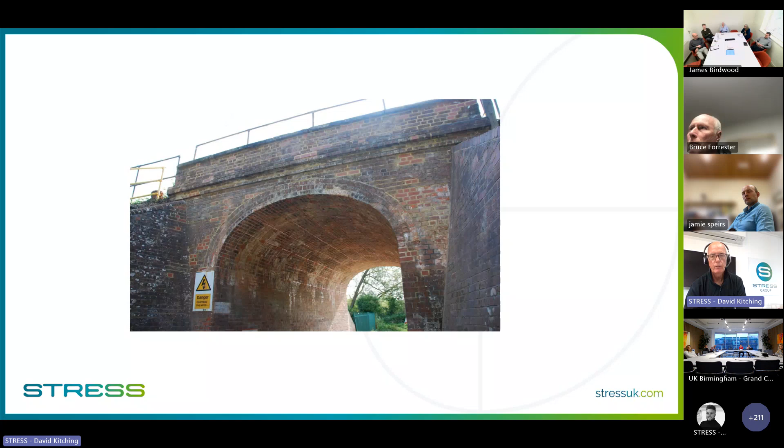So Network Rail were absolutely delighted. They didn't have to take one single train out of timetable. There it is now—you can see the lines where it is, but it's not particularly obvious. And it's being used today, and 5 years later it's looking like the day we put it in.

So a very effective way of doing things, looking laterally—no need to shut the railway down, no need to take half the bridge down, no need to renew it, because that was the option. They didn't know any other way of doing it other than to shut the railway for a period of time, knock that down, and bring in a concrete bridge which needed piled foundations, and the disruption that would cause—you can imagine the timetable cost.

And of course, think about the carbon footprint of doing that little bit of repair and strengthening compared to a big concrete bridge and piles. Anyway, good—I hope that was interesting.

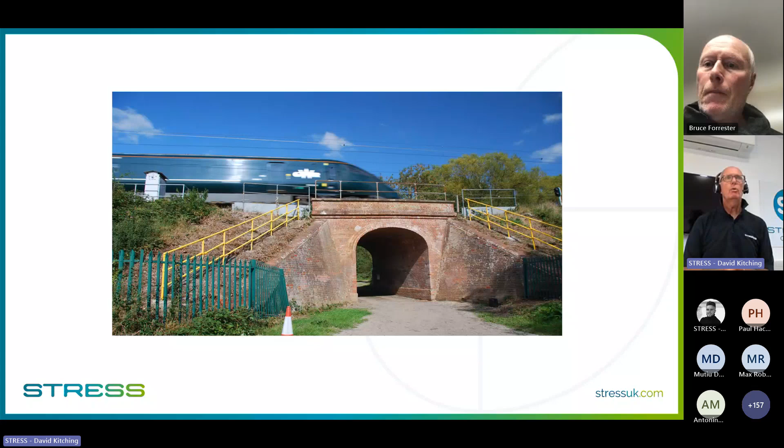That's the point. Again, with the Mars system that you see on that bridge, you can take that back out again and renew it if need be. Obviously, you've then got to put a certain amount of propping in if you want everything to be safe, or you shut the railway. But there's nearly always - I don't think we fit anything that you couldn't renew. Maybe the reforce system into the ground would be very difficult, but it could all be dug out if you needed it. It never needs to be, though.

So a cracking question, and you've opened up just a huge problem when it comes to existing and future buildings.

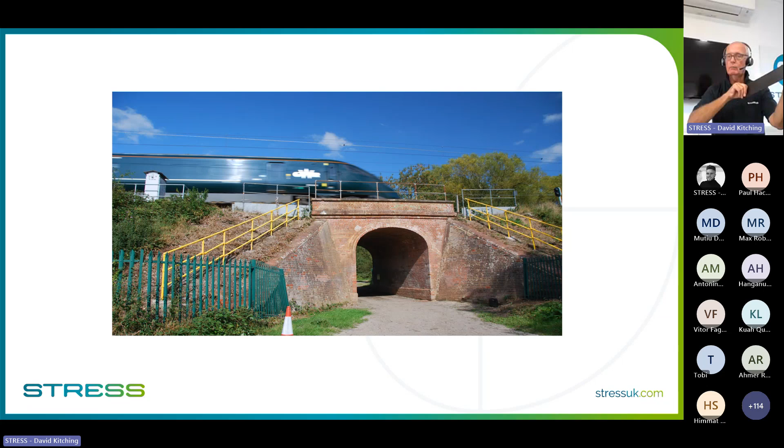And you wouldn't have put a new beam on the underside of the existing? Or was it just going to be too deep? It would have been too deep, and it would have scarred the original design and style aesthetics of the Adelaide balcony - that's an unacceptable method for the conservation officers. If you had to, you could, similar to putting secondary steel in there, but it's not deemed acceptable aesthetically. I'm sure if there was absolutely no other choice than to let it collapse, something could have been done along those lines to beef those beams up. Agreed, but that was the reason.

Okay, thank you, no, thanks for the questions, nice to talk to you again. Brilliant, how we doing, thanks Matt? Thanks Paul, and thanks David. I've probably got one more in this chat.

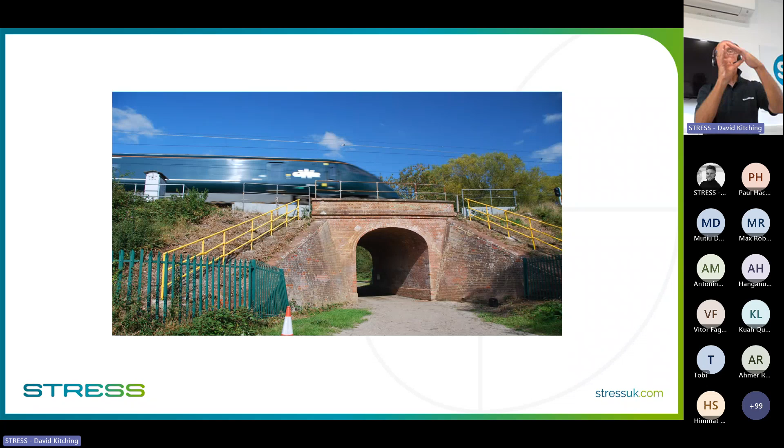It purely sat on the carbon fibre and strengthened that strip on either side, not quite at the springing point - almost at the third point of the arches, near the cast beams. We did do that, though we weren't involved in the design, so there was a lot of logic to it for us, but we didn't query it. Hope that helps.